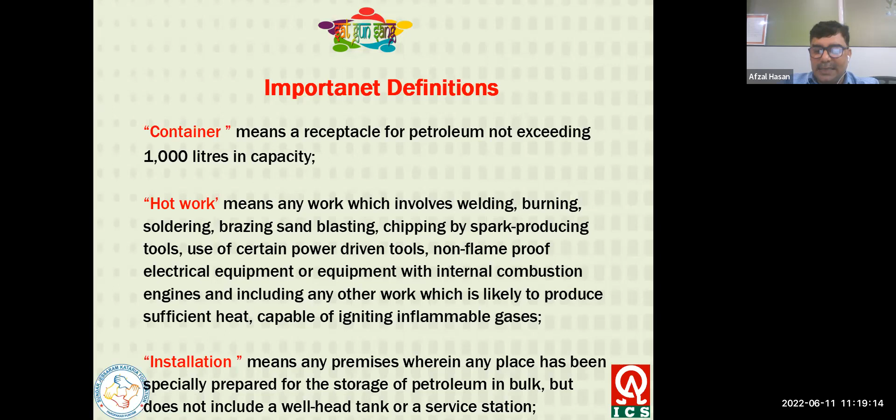Installation means any premises wherein any place has been specially prepared for the storage of petroleum in bulk, but does not include a wellhead tank or service station. Petroleum in bulk means petroleum contained in a tank irrespective of the quantity of petroleum contained therein. Tank means a receptacle for petroleum exceeding 1000 liters in capacity.

Tank vehicle means a vehicle, including a tank wagon, with a tank of capacity over 1000 liters mounted thereon, and also includes refuelers used for refueling of aircraft or on-site refueling of heavy vehicles, machinery and stationary equipment. Tank wagon means a railway carriage with a tank mounted thereon. Chapter 2 of Rule 2002, general provisions.

Rule 2002, clause number 3, restriction on delivery and dispatch of petroleum. No person shall deliver or dispatch any petroleum to anyone in India other than the holder of a storage license issued under these rules, or his authorized agent, or a port authority, railway administration or person who is authorized under the act to store petroleum without a license. Petroleum delivered or dispatched under sub rule 1 shall be of the class and shall not exceed the quantity which the person to whom it is delivered or dispatched is authorized to store with or without license under the act.

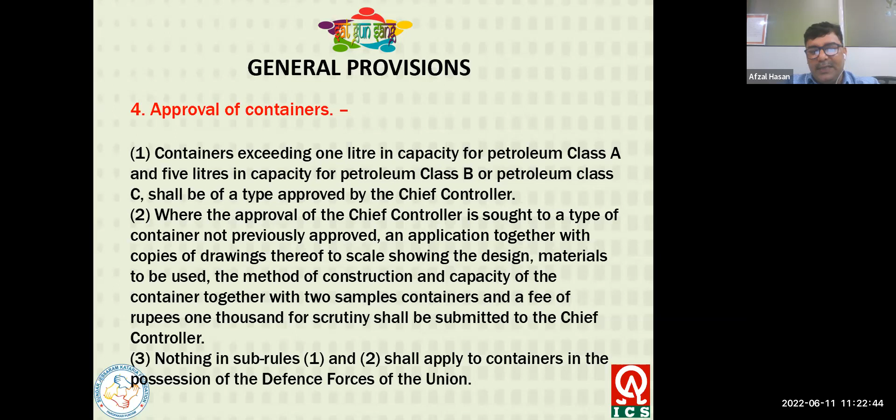Where the approval of the Chief Controller is sought for a type of container not previously approved, an application together with a copy of the drawing thereof to scale showing the design, material to be used, method of construction and capacity of the container, together with 2 sample containers and a fee of rupees 1000 for scrutiny, shall be submitted to the Chief Controller.

Containers for petroleum class A products. Containers shall be constructed of tinned, galvanized, or externally rust-proofed sheet iron or steel, and be of a type approved by the Chief Controller, provided that glass bottles of capacity not exceeding 2.5 liters and of a type approved by the Chief Controller can be used as containers for laboratory chemicals classified as petroleum class A products. Containers shall be so constructed and secured as not to be liable, except under circumstances of gross negligence or extraordinary accident, to become defective, leaky or insecure in transit, and they shall be kept in proper repair.

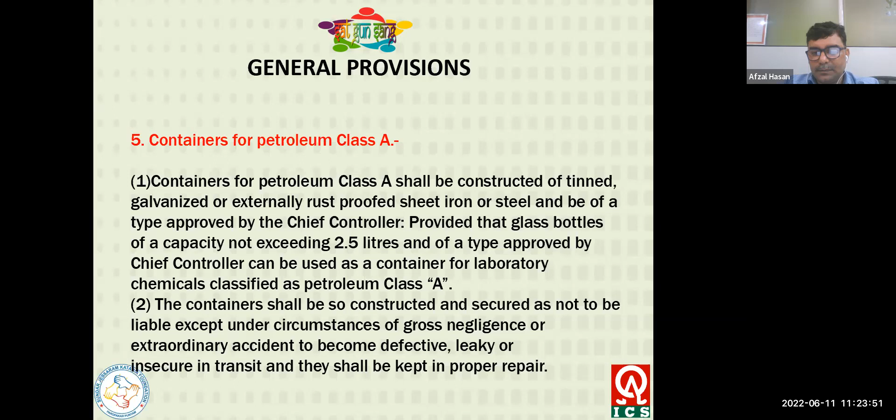Container shall have a well-made filling aperture, which shall be fitted with a well-fitting, secured airtight screw plug or screw cap or other means that should not leak. Containers made of sheet iron or steel shall have the following thickness of metal, based on capacity of container excluding free space, minimum thickness as prescribed in rule, sub-rule 6, of the sheet iron and steel.

So according to the capacity defined here and the respective thickness of the container: not exceeding 10 liters, the thickness requirement is 0.443 mm. If the container exceeds 10 liters and does not exceed 25 liters, the wall thickness should be minimum 0.63 mm. 25 liters to 50 liters, the thickness should be minimum 0.8 mm. Above 50 and up to 200 liters, the thickness requirement is 1.25 mm. Container capacity from 200 liters to 300 liters, minimum wall thickness should be 1.59 mm. So this is the design requirement for containers used for petroleum class A.

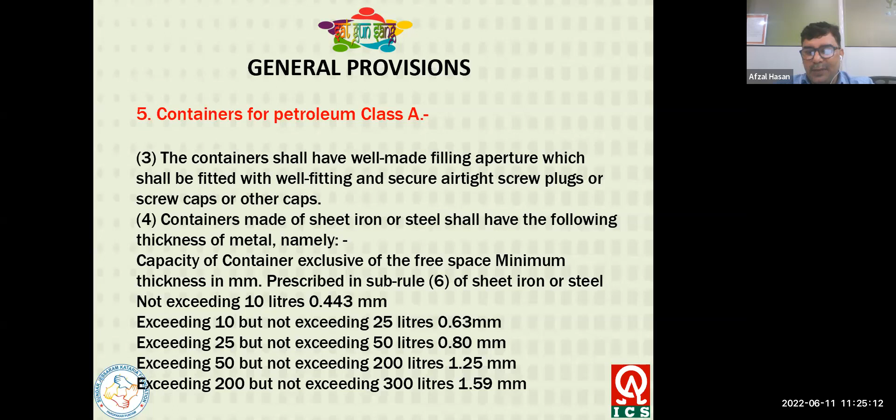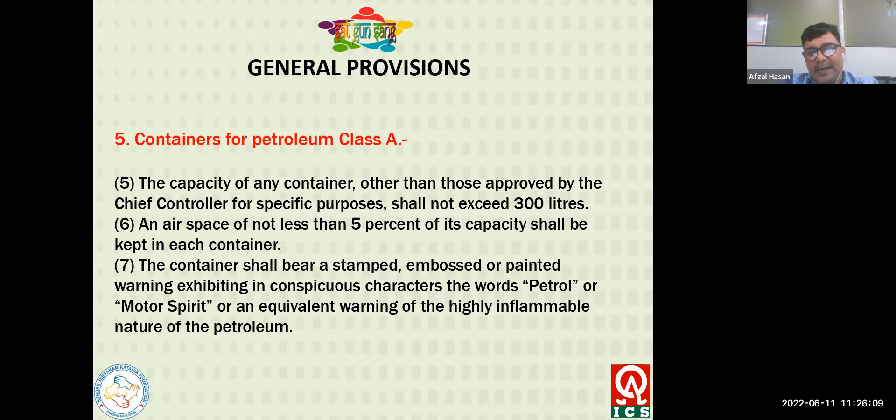Capacity of any container other than those approved by the chief controller for a specific purpose shall not exceed 300 liters. So the maximum capacity of any container used for transportation of class A petroleum products should not be more than 300 liters. An airspace of not less than 5% of the capacity shall be kept in each container. So whatever the approved capacity, in addition the container should have 5% space for air. Container shall bear a stamped, embossed or painted warning, in conspicuous characters, the word petrol or motor spirit, or an equivalent warning of the highly inflammable nature of the petroleum.

Containers for petroleum class B and C. Under this clause, containers used for class B and C petroleum shall be constructed of steel or iron and be of a type approved by the chief controller. Airspace of not less than 5% of its capacity shall be kept in each container for petroleum B, or not less than 3% of its capacity in each container for petroleum C. Nothing in this rule shall apply to containers for the defense sector.

Empty receptacles. All empty tanks which had petroleum class A or petroleum class B. Empty containers which had petroleum class A shall, except when opened for the purpose of filling, cleaning, or rendering them free from petroleum vapor, be kept securely closed until they have been thoroughly cleaned and freed from petroleum vapors.

Under Rule 8 of the Petroleum Rules 2002, repair to receptacles: no person shall repair or cause to be repaired by the use of hot work any tank or container which had petroleum unless it has been thoroughly cleaned, freed from petroleum and petroleum vapor, or otherwise prepared for safely carrying out such hot repair, and certified in writing by a competent person to have been so prepared. The certificate required under sub-rule 1 shall be preserved by the repairer for a period of at least 3 months and produced to an inspector on demand.

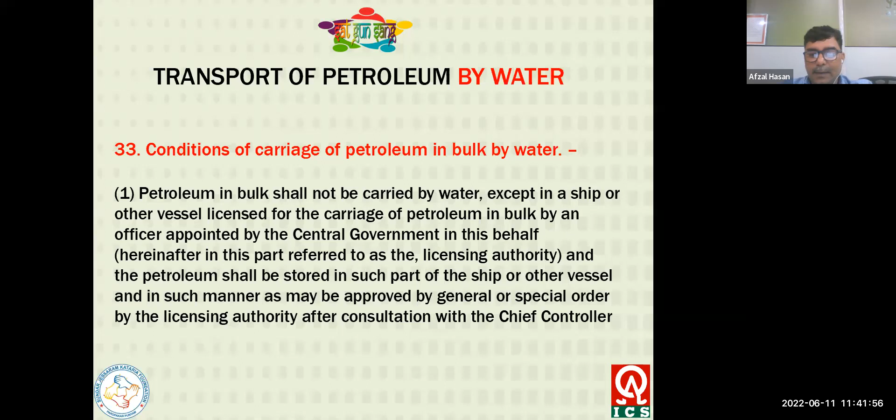Tank fittings on ships or vessels. Clause number 35 talks about the fitting requirements used on ships or vessels. The following provisions shall apply for the transport of petroleum other than petroleum class C in ships or other vessels, namely: all tanks shall be fitted with independent approved filling and suction pipes and valves, or standpipes with blank flanges, all the pipes being carried down nearly to the bottom of the tank, and no petroleum in bulk shall be taken on board or discharged except through such pipes and valves unless otherwise permitted by the chief controller in writing.

All the tanks shall be fitted with manholes having screw-down covers with petroleum-tight joints. In case of tanks intended for use with petroleum class A, ventilators or relief valves of approved pattern, properly protected with wire gauze of mesh not less than 11 mesh to the linear centimetre, and ventilators similarly protected shall be fitted to all spaces around the tank.

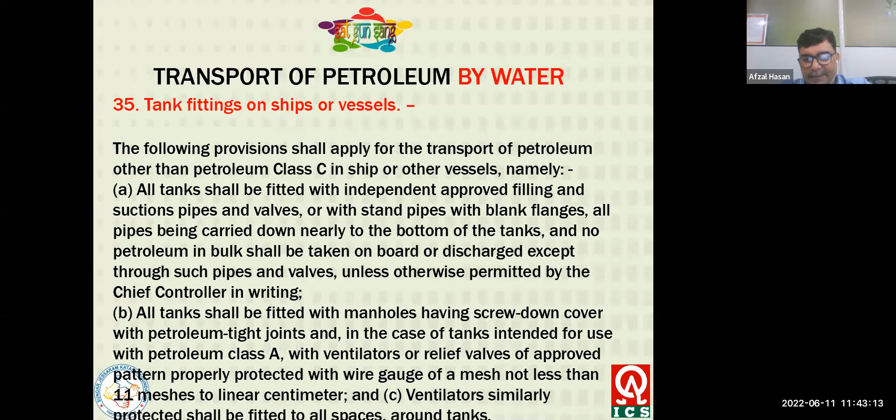Rule 38, restriction on cargo or passengers. No ship or other vessel shall carry petroleum in bulk if it is carrying passengers or any inflammable cargo other than petroleum or coal. This rule shall not apply to petroleum class C used as fuel carried in cellular double bottoms under the engine and boiler compartments and under the ordinary hold. Such fuel oil tanks and installations connected therewith shall comply with the provisions of Indian merchant shipping.

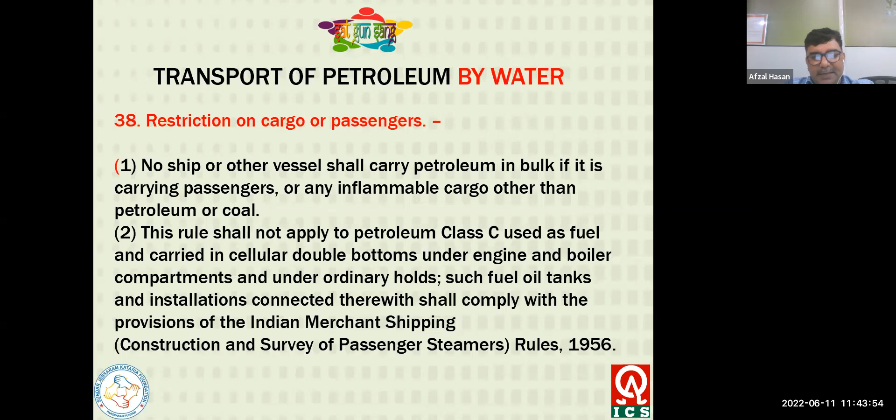Rule number 63 is applicable for the transport of petroleum on land by vehicle. Tank vehicles used for transport of petroleum. Every tank vehicle used for the transport of petroleum in bulk on land shall be built, tested and maintained in accordance with the requirements laid down in the third schedule and be of a type approved in writing by the chief controller, provided that the chief controller may, under exceptional circumstances to be recorded in writing, waive any of the requirements of the third schedule.

Tank shall be fabricated and mounted on the vehicle chassis by a manufacturer approved by the chief controller. Means no tank is allowed without approval from the chief controller for transportation of petroleum on land by vehicle. Such a manufacturer shall apply to the chief controller for approval with the particulars of facilities and competent persons available with him and a scrutiny fee of ₹500. So this is the requirement. No vehicle can be used for transportation of petroleum product on land otherwise.

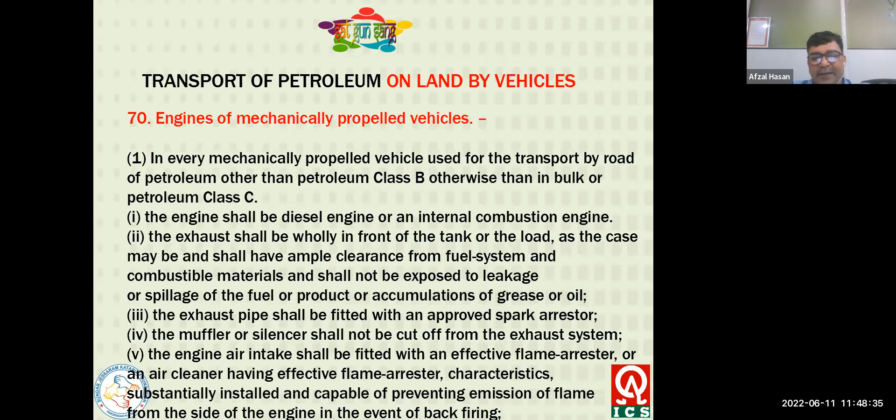Exhaust pipe shall be fitted with an approved spark arrestor. Muffler or silencer shall not be cut off from the exhaust system. Engine air intake shall be fitted with an effective flame arrestor or air cleaner having effective flame arrestor characteristics, substantially installed and capable of preventing the emission of flame from the side of the engine in the event of backfiring.

Rule 71. It talks about the electrical installation requirement in the vehicle used for transportation of petroleum on land. Where electric light or instrument or any other electrically operated equipment is employed on any vehicle, including trailer, used in the transportation by road of petroleum other than petroleum class C, the pressure of the electric circuit shall not exceed 24 volts.

Electrical wiring shall be heavily insulated and adequate for the maximum load to be carried, with suitable overcurrent protection in the form of fuse or automatic circuit breaker, installed so as to be protected from physical damage and contact with possible product spill, and have all junction boxes in sealed condition. The generator, battery, switch, fuse, circuit breaker shall be carried in the cab of the vehicle or in the engine compartment, and battery shall be in an easily accessible position with a heavy duty switch close to it to cut off the battery.

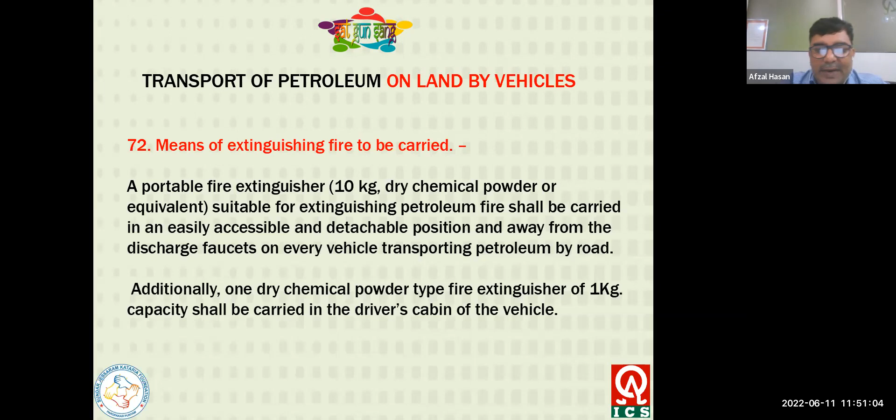Rule 72. Means of extinguishing fire to be carried. A portable fire extinguisher, 10 kg dry chemical powder or equivalent, suitable for extinguishing petroleum fire, shall be carried in an easily accessible and detachable position away from the discharge faucet on every vehicle transporting petroleum by road. An additional dry chemical powder type fire extinguisher of 1 kg capacity shall be carried in the driver's cabin of the vehicle. So minimum two: one 10 kg, installed at a very easily accessible location, and one 1 kg fire extinguisher in the driver cabin.

Vehicle to be constantly attended. Every vehicle which is engaged in the transport of petroleum by road shall be constantly attended to by at least one person who shall be familiar with the rules in this part. Provided, every vehicle in which more than 5 kiloliters of petroleum other than petroleum class C is carried shall be attended to by the driver and at least one more person, both of whom shall be familiar with the rules in this part.

Prohibition as to parking. No vehicle carrying petroleum by road shall be parked on the public road or in any congested area or at a place within 9 meters of any source of fire.

Rule 75. License necessary for the transport in bulk of petroleum class A and class B. No person shall transport petroleum class A or petroleum class B in bulk by road except under and in accordance with the conditions of a license granted under these rules.

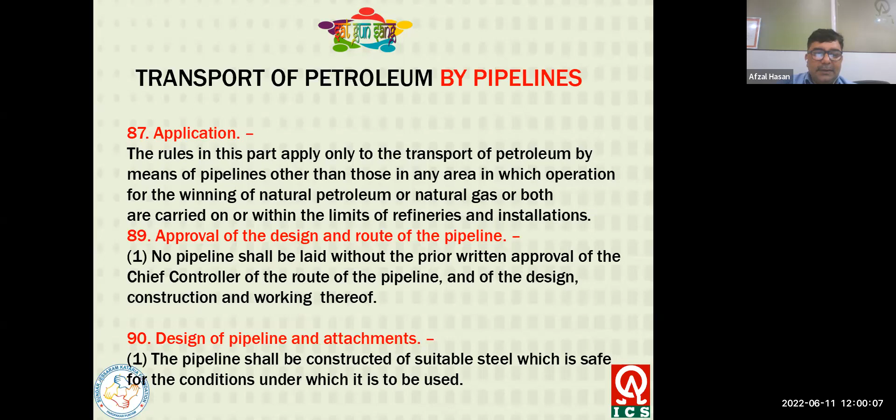Rule 89. Approval of the design and route of the pipeline. No pipeline shall be laid without the prior written approval of the Chief Controller of the route of the pipeline, and the design, construction and working thereof.

Rule 90. Design of pipeline and attachment. Pipeline shall be constructed of a suitable steel which is safe for the condition under which it is to be used.

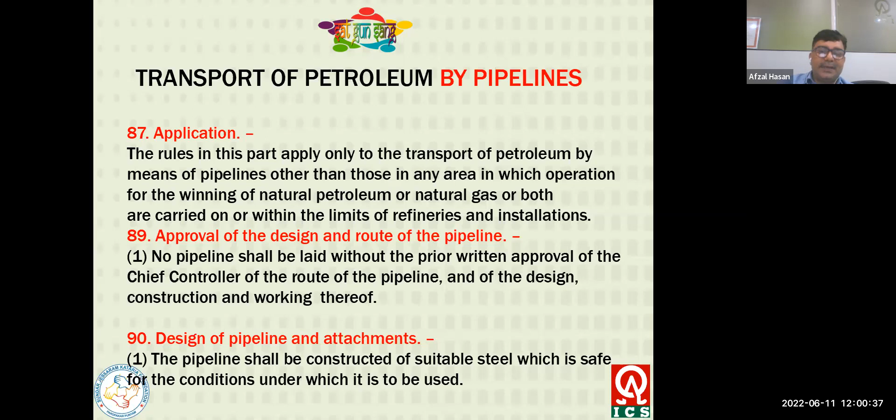Pipeline and components shall be designed and constructed in accordance to the code recognized by the Chief Controller, OISD standard 141, regarding design and construction requirement for cross-country hydrocarbon pipeline, and shall be capable of withstanding a pressure which shall not be less than the maximum working pressure thereof plus an allowance for surge pressure as anticipated. Provision shall be made for the thermal expansion or contraction of pipeline for the prevention of excessive stress on the pipeline or its anchorage, guide or connections.

Pipeline shall be protected by the casing of a steel pipe to prevent damage to pipeline from the usual external conditions which may be encountered in railway crossing, road crossing, river, water course crossing, bridge crossing, etc. This means all crossings shall be done with cased crossing.

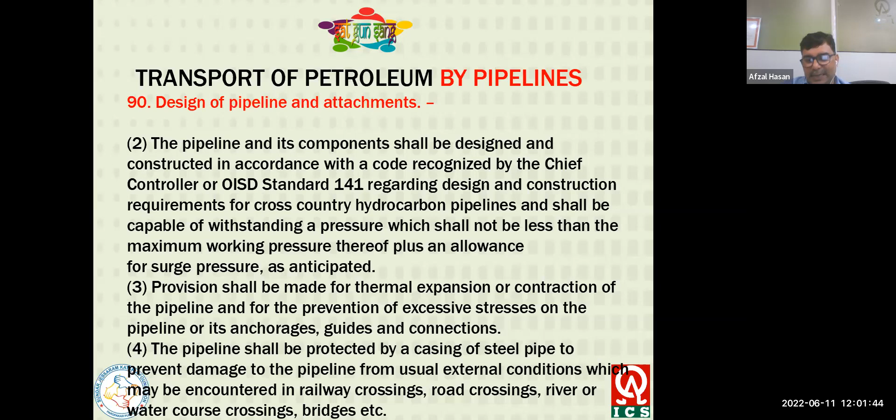Design of pipeline and attachments. Bypass relief valve, pressure limiting stations, or automatic shutdown equipment of approved design shall be provided in the pipeline to prevent rising at any time of the pressure in the pipeline to a pressure which exceeds the design internal pressure by more than 10 percent.

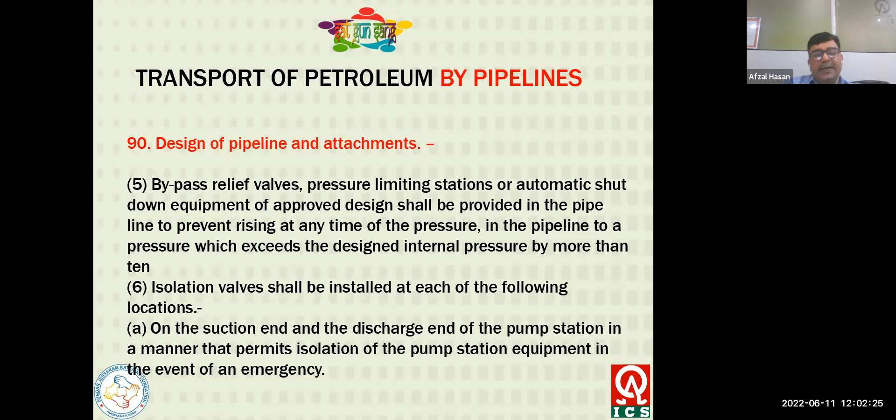Isolation valves shall be installed at each of the following locations: one, on the suction end and the discharge end of the pump station in a manner that permits isolation of pump station equipment in the event of any emergency; and on each line entering and leaving the installation in a manner that permits isolation from other facilities.

On each main line, isolation valves along the pipeline system shall minimize damage from accidental product discharge, and shall be appropriate for the terrain, whether open country or location near a city or other populated area. On each lateral takeoff from the trunk line, valves shall permit shutting off the lateral without interrupting the flow in the trunk line.

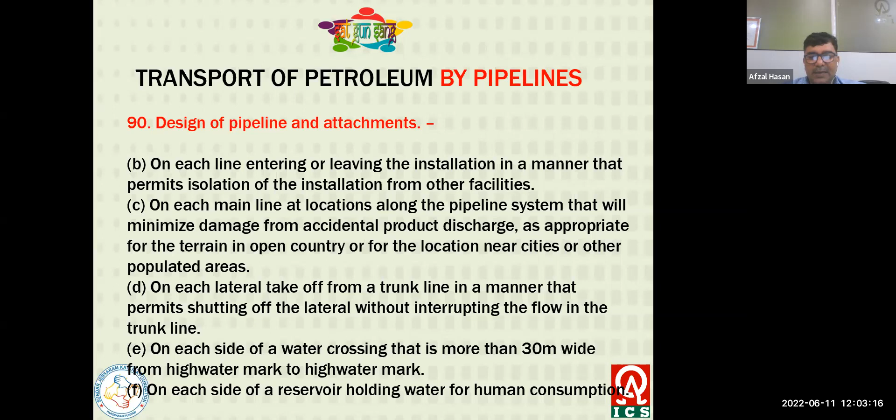On each side of a water crossing that is more than 30 meters wide, from the high water mark to the high water mark.

Laying of pipeline. Pipeline shall be laid in the most favorable route, avoiding as far as possible known obstructions and areas in which unusual external conditions prevail. Pipeline shall be laid below the ground level except where laying above ground level is desirable for topographical, economic or other special reasons.

Where an underground pipeline has to cross any existing underground water or gas line, cable, drain, or other service, the pipeline shall be laid at least 30 centimeters below such service in a manner that will not obstruct access to such service for inspection, repair, maintenance. The number of bends in the pipeline shall be kept to a minimum by proper grading of trench or support at crossings and other obstacles.

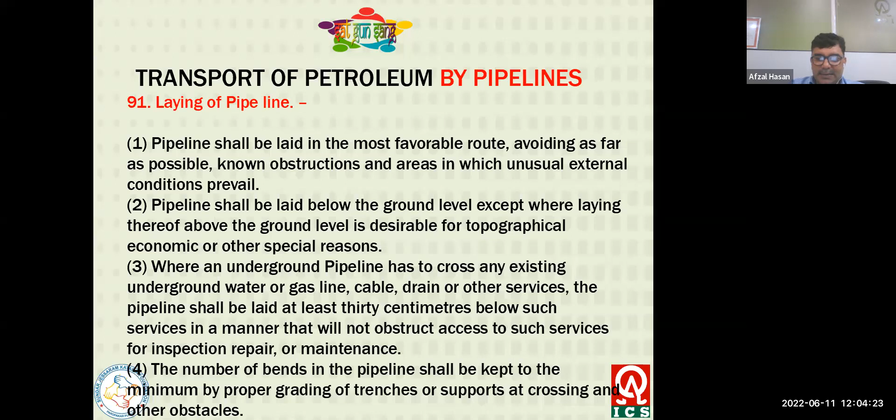Rule 92. Protection against corrosion. Pipeline shall be protected against corrosion by suitable coating, wrapping, and where necessary by cathodic protection.

Rule 93, hydrostatic testing of pipeline. Before transporting petroleum for the first time, each pipeline or completed section thereof shall be filled with water and the pressure in the line or section, as the case may be, raised to 1.1 times the designed internal pressure and maintained for a period of 24 hours.

As per the procedure laid down in the relevant pipeline design code recognized by the Chief Controller, pipeline or section thereof showing any significant drop of pressure during the period of testing shall not be used for transporting petroleum until the necessary repairs have been carried out and a satisfactory retest done.

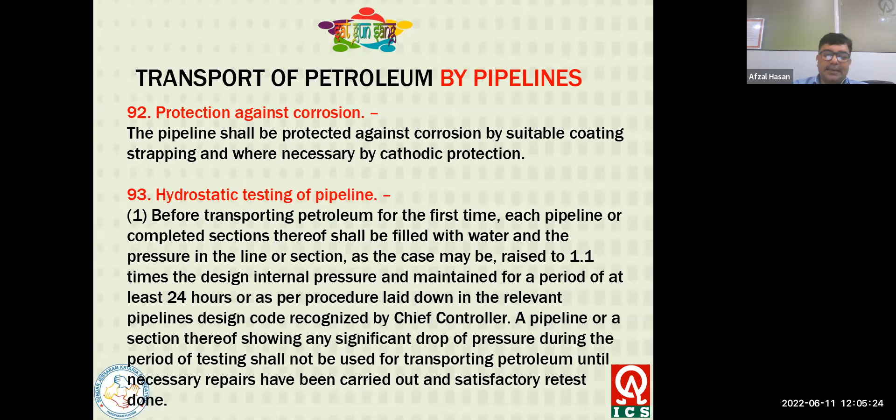Rule 96, checking of gauges. Tank gauges or gauges at the intermediate or booster pump station shall be checked at least once a year. Means calibration shall be done every year.

Addition and alteration in the pipeline. No addition or alteration to a pipeline shall be carried out without prior approval of the Chief Controller in writing.

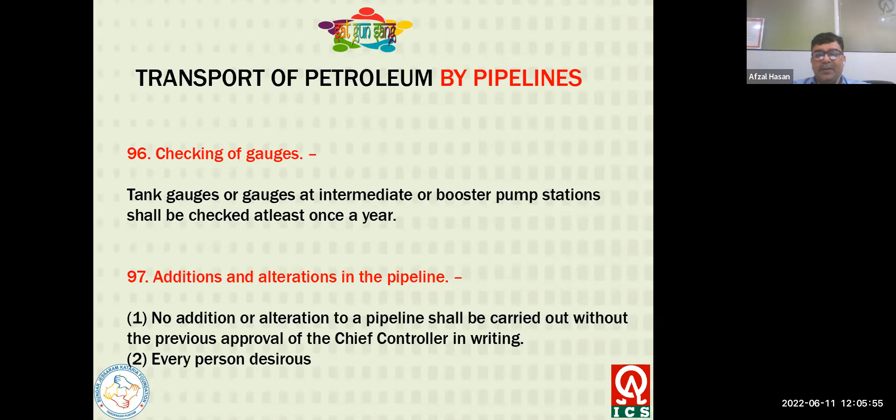Chapter 4, electrical installation. Clause number 102, restriction on the electrical installation and apparatus: save as provided in this chapter, no electrical wiring shall be installed, no electrical apparatus shall be used in any refinery, installation, storage shed, service station, or in any other place where petroleum is refined, blended, stored, loaded, or unloaded.

Hazardous area. For the purpose of this chapter, an area shall be deemed hazardous where petroleum having a flash point below 65 degrees centigrade, or any inflammable gas or vapor in concentration capable of ignition, is likely to be present. Petroleum or any inflammable liquid having a flash point above 65 degrees is likely to be refined, blended, handled, stored above its flash point.

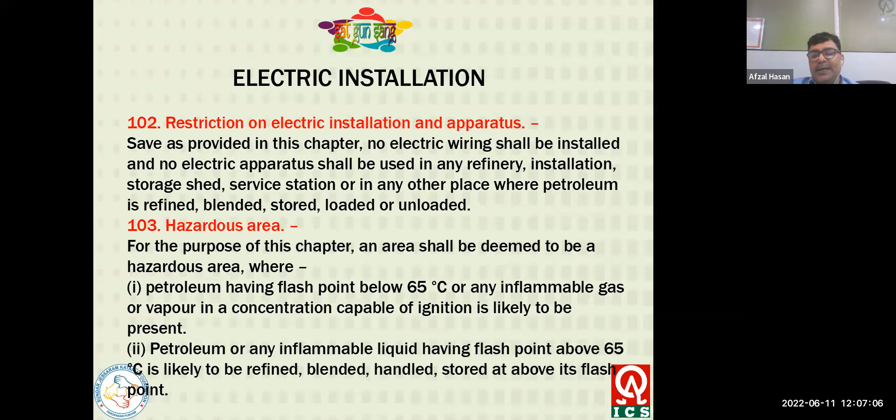Classification of hazardous area. Hazardous area shall be deemed zone 0 if inflammable gas or vapor is expected to be continuously present in the area. Zone 1 area: inflammable gas or vapor is likely to be present under normal operating conditions. Zone 2 area: inflammable gas or vapor is likely to be present only under abnormal operating conditions, such as failure or rupture of equipment.

If any question arises as to whether the hazardous area is zone 0, 1, or 2, the decision of the Chief Controller shall be final.

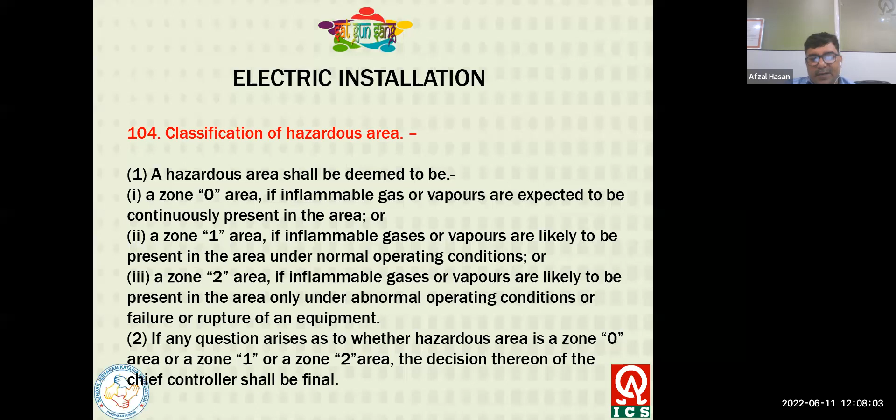Clause rule 114, certificate of electrical installation. Before energizing any electrical circuit or apparatus in a hazardous area for the first time, and after each repair, maintenance, or alteration work carried out on such circuit or apparatus, a competent person shall issue a certificate under signature to the effect that the circuit and apparatus have the safety characteristics upon which their use in such area has been approved.

Rule 115, precautions against corrosion: where necessary, all electrical apparatus, equipment, and conduit carrying electrical wiring in a hazardous area shall be regularly treated with suitable protective paints.

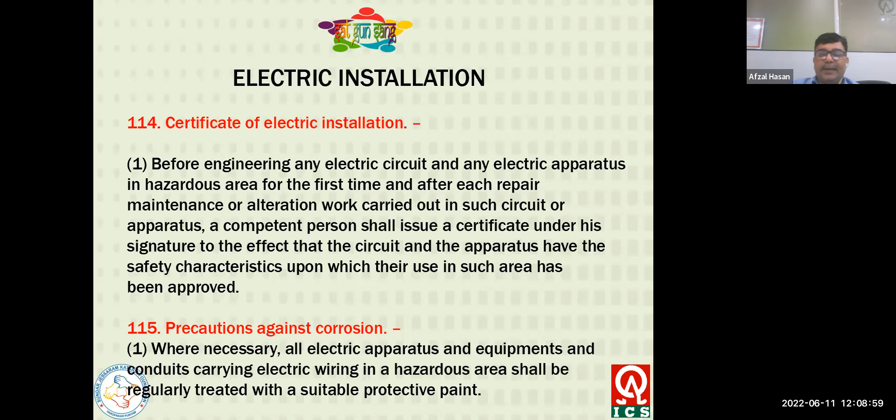Chapter 5, storage of petroleum requiring license. License for storage, as provided by section 7, 8, 9 of the Act 1934. No person shall store petroleum except under and in accordance with the license granted under these rules.

Provided that no license shall be necessary for the storage of petroleum in the wellhead tank, or for the storage of petroleum in transit cargo within the limits of the port, subject to such conditions as may be specified by the conservator.

Precautions against fire. No person shall smoke in the installation, storage shed, or service station, save in a place specifically authorized by the licensing authority for the purpose. No person shall carry matches, fuses, or other appliances capable of producing ignition or explosion in any installation or storage shed used for storing petroleum.

No fire, furnace, or other source of heat or light capable of igniting inflammable vapor shall be allowed in any installation, storage shed, or service station, save in a place specifically authorized by the licensing authority for the purpose.

An adequate number of portable chemical powder fire extinguishers shall always be kept. Every storage shed and small class B or C installation at strategic points, and all persons employed at such locations, shall be conversant with the use of such fire extinguishers.

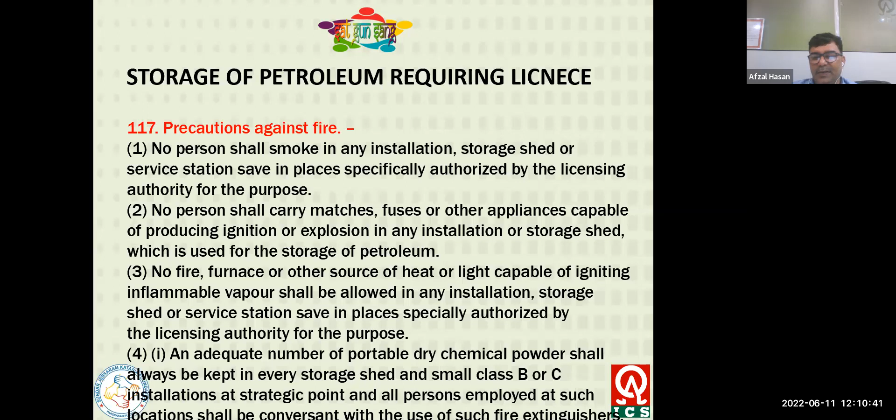Rule 118, supervision of operations within the installation, service station, and storage shed. All operations within the installation, service station, or storage shed shall be conducted under the supervision of an experienced, responsible agent or supervisor who is conversant with the terms and conditions of the license held for the installation, service station, or storage shed, as the case may be, and such persons should have proper safety training.

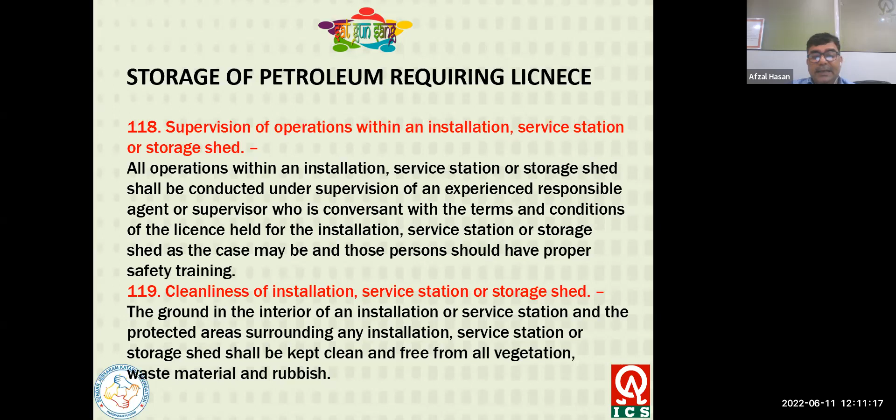Rule 119, cleanliness of the installation, service station, or storage sheds.

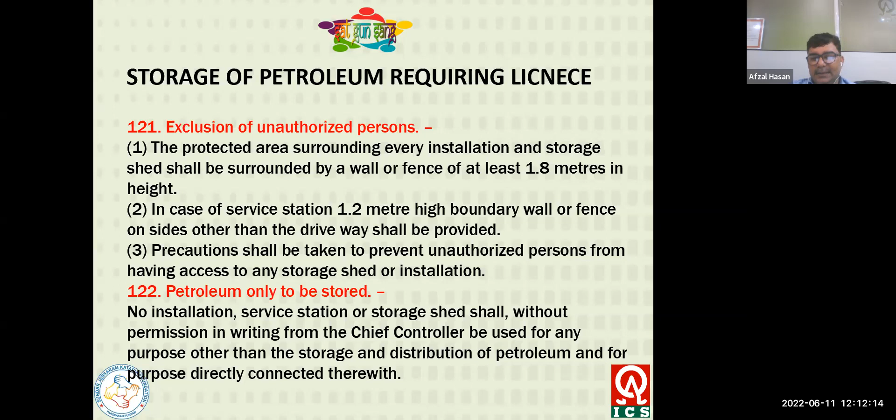No installation, service station, or storage shed shall, without permission in writing from the Chief Controller, be used for any purpose other than the storage or distribution of petroleum, or for purposes directly connected therewith.

Marking the capacity of the tank in liters or kiloliters: every above-ground tank in any installation shall be marked on the tank. Construction of tank: every tank or receptacle for bulk storage of petroleum, other than the wellhead tank, shall be constructed of iron or steel in accordance with code specifications approved by the Indian Standards Institution or any other code specification approved in writing by the Chief Controller.

Tanks other than receptacles shall be erected on a firm foundation or support of non-combustible material in accordance with sound engineering practice. The height of the storage tank shall not exceed 1.5 times its diameter, or 20 meters, whichever is less.

After undergoing reinstallation or any major repair, the tank shall, before being put into use, be tested by water pressure by the competent authority. This means the storage tank cannot be used without getting the certificate, without witnessing from the competent authority.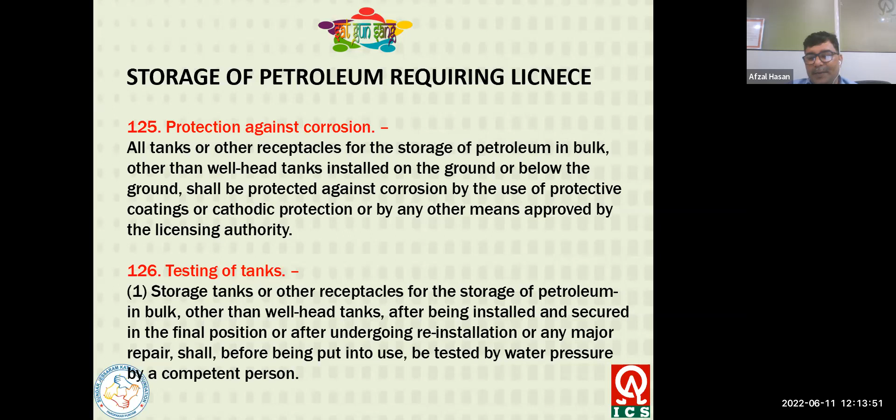Testing: water used for testing shall be free from petroleum and shall not be passed through any of the pipe or pump ordinarily used for the conveyance of petroleum.

The competent person carrying out the testing required under the rule shall issue the certificate for tank testing under rule 126, and the certificate so issued shall be submitted to the licensing authority along with the application for grant or amendment of the license in case of any major repair.

Earthing of the tank is a requirement; the tank shall be earthed, and this should be checked by the competent person.

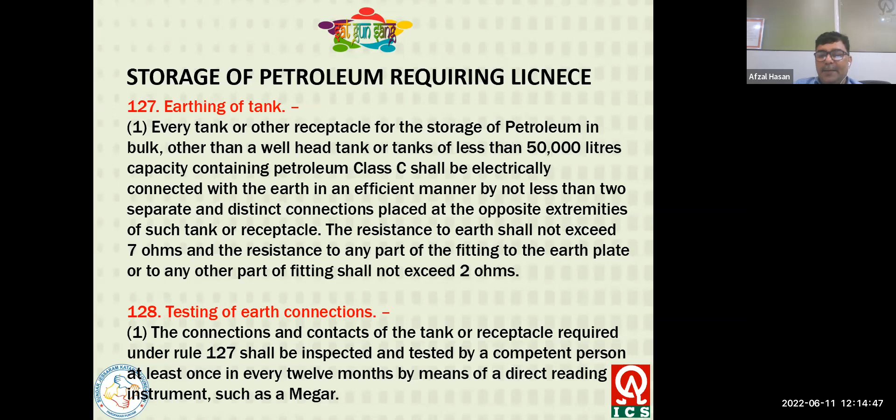Testing of each connection and contact of the tank receptacle required under rule 127 shall be inspected and tested by the competent person at least once in every 12 months by means of direct reading instruments such as a Megar.

Night working: no installation storage shed shall be open, and no work in any installation storage shed shall be permitted between sunset and sunrise, except where electric lights conforming to the provisions of Chapter 4 are exclusively used.

Certificate of safety under rule 130, issued by the competent person, shall be furnished to the licensing authority before any petroleum is stored in an installation or service station for the first time, whenever any addition, alteration, or enclosure wall work is carried out, or when any tank is installed or its position is shifted.